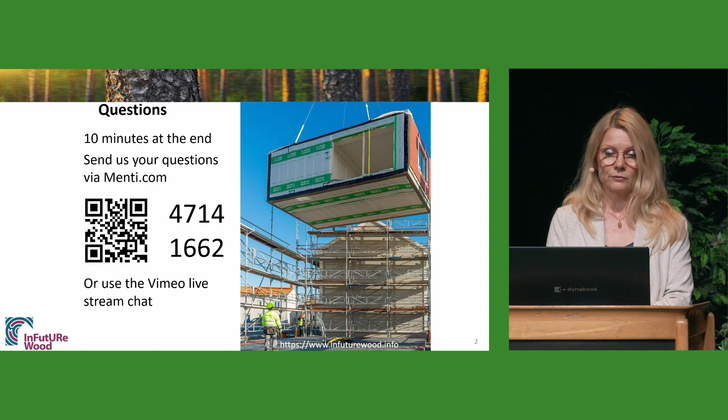InFutUReWood tries to explain or answer the question: how should we build today to be able to circulate tomorrow? And to do so, but the question is, why? Why should we do this? Why should we reuse wood?

Why should we recycle? Wood is a renewable source. The trees grow up again, binding carbon dioxide. But we do this because we have to, from many points of view, and you can see some of them here. This is a priority in EU and national regulations and initiatives for sustainable use of natural resources, and for collection, reuse of materials and waste.

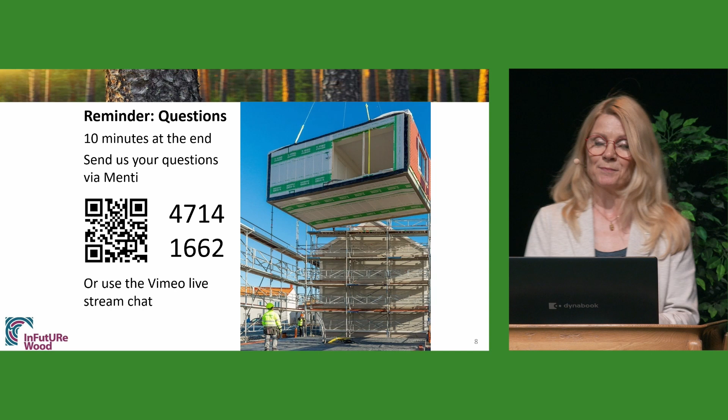And now I give over to Bahar Nasiri. Thank you, Karin. Good afternoon, everybody. I'm Bahar Nasiri, I'm actually from Aalto University. And today I present part of the work that we've done in the InFutUReWood project, and the topic is about inventory, deconstruction and quality of recovered wood.

The objective of the work we've done was to understand the volume, dimension, and criteria influencing the quality of reclaimed wood, and also to understand why prioritizing reuse and recycling of wood through cascading is important.

To understand this, as a first step, together with our colleagues in Spain and Ireland and us in Finland, we inventoried timber products in residential buildings. Our analysis basically showed that, for example, in Finland, 17.5 megatons of timber is in structural parts of residential houses in 2017, of which 60% are from houses built pre-1969. In Ireland, even though masonry construction has been the dominant construction method, wood can still be found in large quantities.

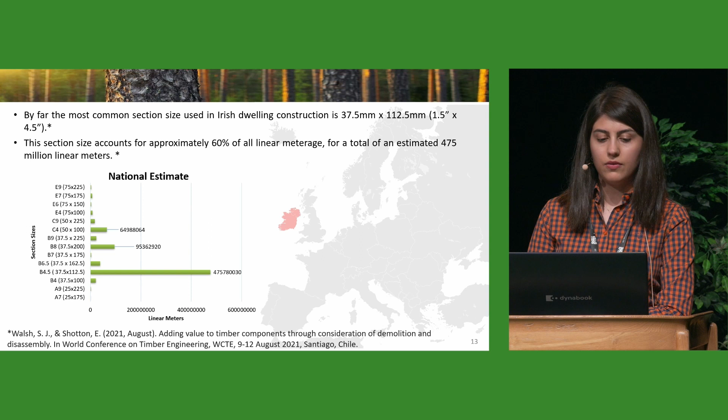And as you can see in this figure, 60% of the estimated stock is from B4.5 timber. Also in Spain, it was basically found that pre-modern buildings are a good source to find reclaimed wood, due to the different dimensions that we can get from these buildings, and also their joinery technique is basically steel-free, which is favorable for reuse as well.

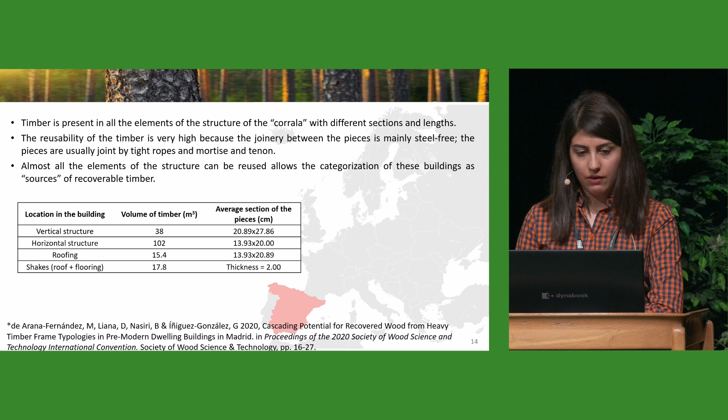But even though we have all these resources, reuse and recycling haven't been implemented in practice yet. To understand why, we basically talked to demolition waste management and wood processing companies in our partner countries.

From a few insights that we got from talking to people in industry, and also where possible conducting site visits, we found that mechanical demolition basically degrades the quality of wood, while deconstruction can decrease the risk of damage to wood. However, at the moment, deconstruction is not an economic, time-efficient, and viable alternative for contractors.

The design of buildings doesn't basically allow demolition contractors to extract the materials intact, and even when there is an opportunity where it can be, for example, easily reused or recycled, it is imperative to develop accessible, practical guidance on the development of design for deconstruction and reuse.

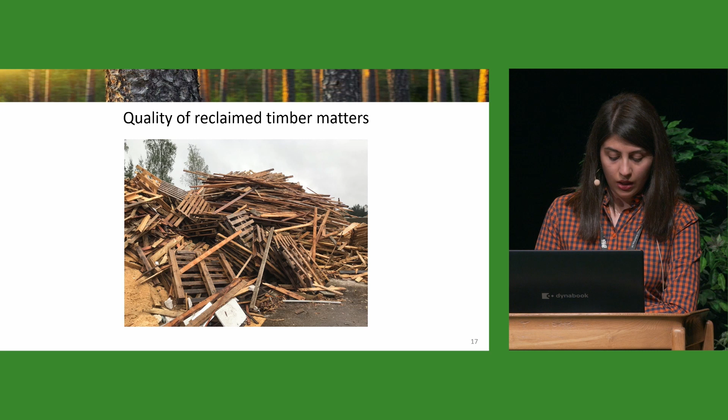Also, during the use phase and demolition phase, damage to wood may occur. Traditionally in some buildings, wood preservatives have been used to improve resistance to decay, and those materials cannot be reused or recycled at the moment because the substances used are basically hazardous.

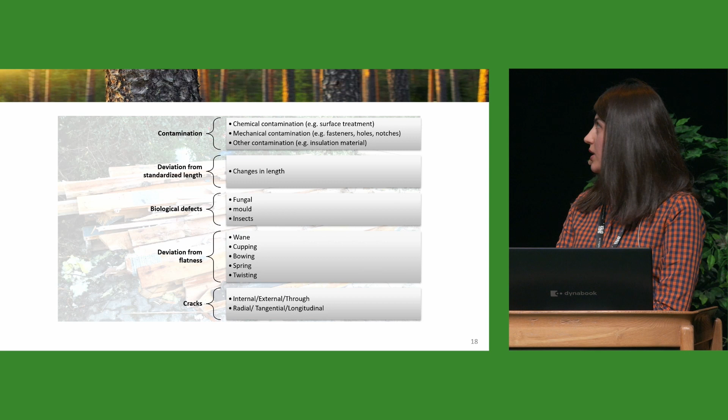To see what we should consider, we came up with this criteria, as you can see on this figure, that should be evaluated to determine whether the condition of wood meets the requirements for production of new products or not. We came up with a pre-sorting system to understand what we have as a secondary resource at the moment.

I want to summarize the key findings: the work we've done inventoried timber used for construction of residential buildings in Finland, Ireland, and Spain. The existing buildings in these countries contain a large amount of timber that could be reused or recycled.

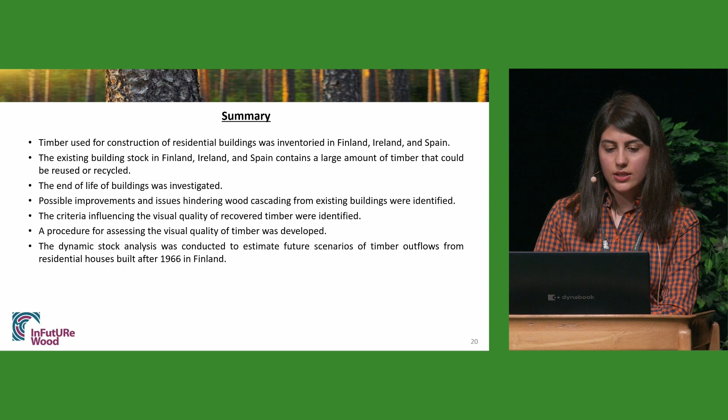In Finland, we also ran a dynamic stock analysis and estimated future wood waste scenarios for residential houses built after 1966.

Strength grading of structural timber isn't only about strength, but strength is the most difficult part of it. We can only measure strength destructively, so we have to use predictions and a probabilistic approach. This is done with the characteristic value at the 5th percentile. We grade in such a way that no more than 5% of the pieces have a strength lower than the strength class requirement. We just don't know which pieces they are unless we break them. With new timber, we make use of information about species and growth area, because both affect the link between the things we measure in grading, the indicating properties, and the things we are predicting, the grade determining properties. These correlations are more like associations than direct causal relationships.

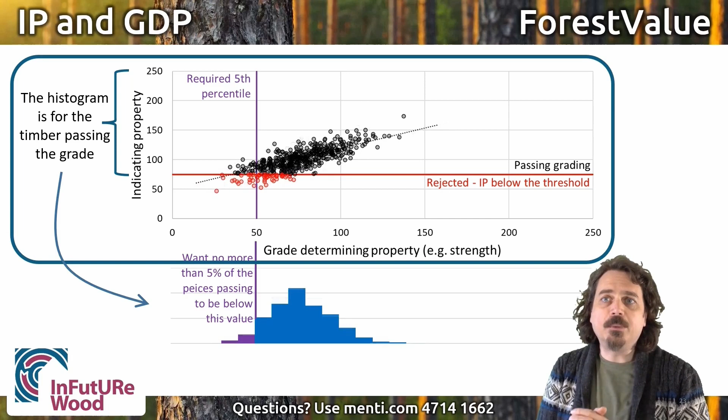Knowing species and growth area is not really possible for recovered wood, and is also complicated by growth conditions having changed over time, perhaps changing those correlations that we rely on.

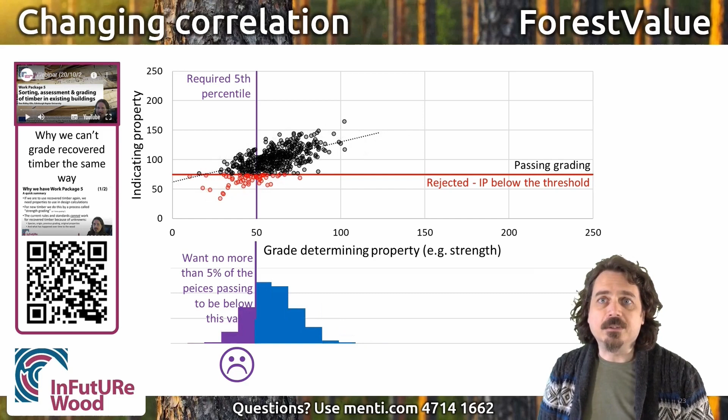But anyway, the current grading approach is inadequate because of something else even more important that might have happened. It might be that there was some prior grading or sorting, or perhaps something happened in service that changed the timber properties. If that selectively removed more of the stronger pieces, the characteristic value is reduced below what we think we have.

If we know the original grade of the timber, we have some helpful information, but we cannot necessarily rely on that. And anyway, who is responsible for that declaration of performance? We better have a way to grade recovered wood so that we can confidently use it.

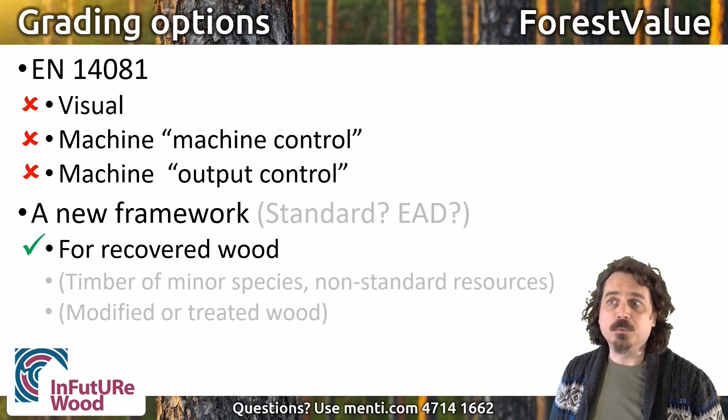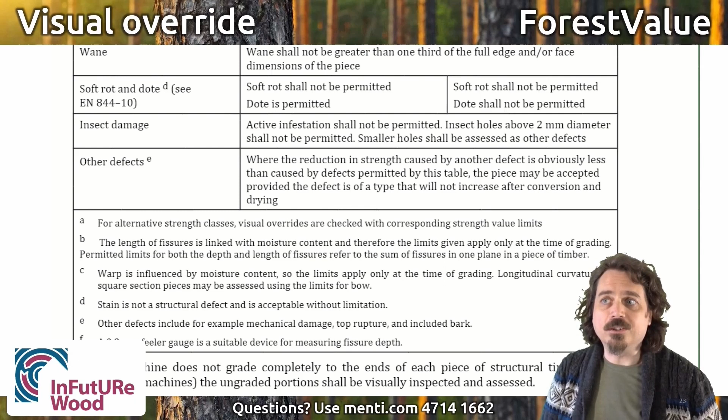The visual override step is like it is for new timber and serves the same purpose, but we need to include a few additional things that cover additional problematic defects that occur in recovered wood, such as drilled holes and cut notches. This builds on the sorting criteria developed in Work Package 4.

After we've done this, all the timber that we send to the grading process is potentially usable. The new strength grading process can be outlined as follows.

Use grading technology to assess each piece and get a probabilistic prediction of the key properties of that piece. Density and stiffness are pretty easy to do. Next, combine that probabilistic prediction over a set of pieces to get a combined probabilistic description of the set.

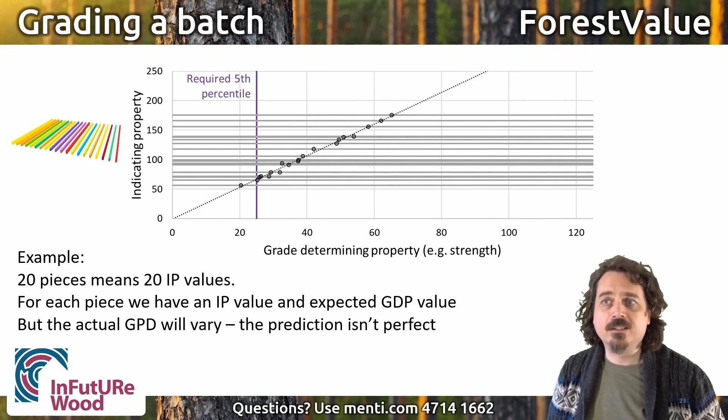Practically, this can be achieved by treating each actual piece as a multitude of possible pieces, representing all the potential strengths, so that we can work in a non-parametric way with numbers rather than distributions. Think of it as like seeing all the possible future timelines at once.

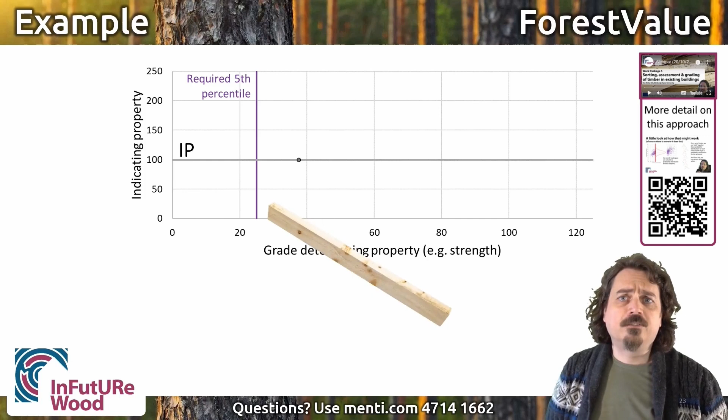So, for this example here, we have one piece with a certain indicating property value. That gives us an expected value for the strength, and a measure of how much it might vary from this. We can take a set of equally likely possible pieces, which covers the results we would get if we could test that piece many times, as if in slightly different parallel universes.

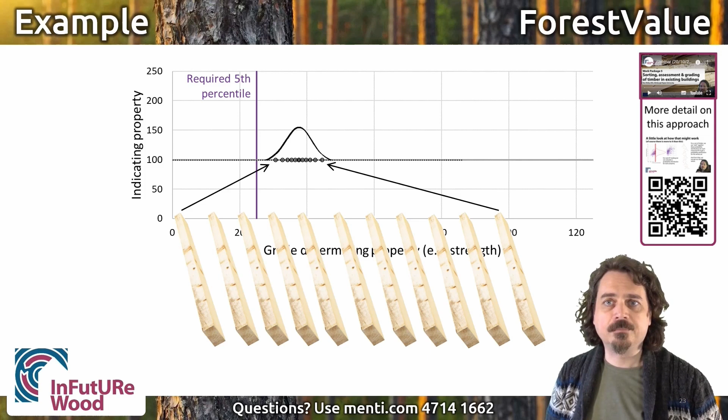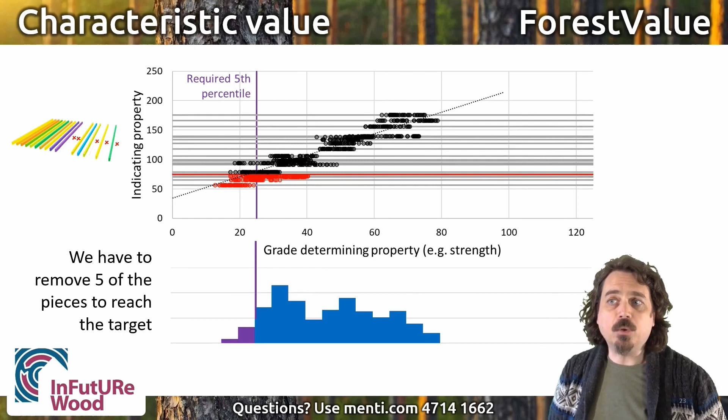That allows us to calculate characteristic properties of that set of pieces in the same way that we do now for new timber. We compare that to what we need for the target strength class or the application, and if necessary, we remove some of the pieces from the set to raise the characteristic values. When we remove an actual piece, we remove all the associated possible parallel universes pieces in that dataset.

In simple terms, comparing to how we grade new timber at the moment, we go from properties predictions made on populations of timber to making properties predictions on a piece-by-piece basis. But we also go from making grading sorting decisions on individual pieces to making grading decisions based on information from sets of pieces.

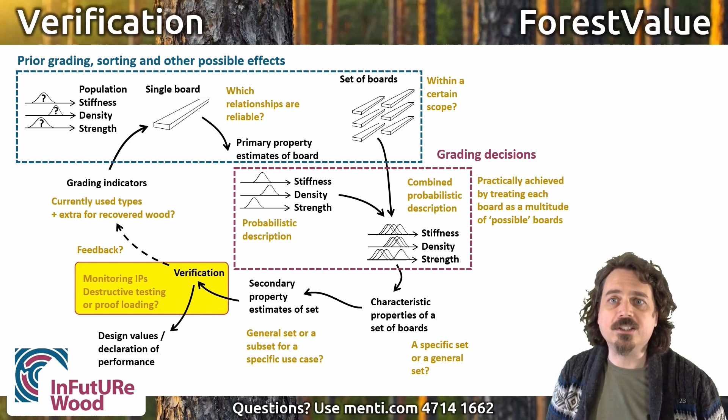We still need to verify the grading, and this can be done with a combination of destructive testing a portion of the graded timber and monitoring of the grading indicating properties to look for any problematic changes in the correlations. The data from the verification can help build better predictive models, making the grading process less conservative as more timber is graded.

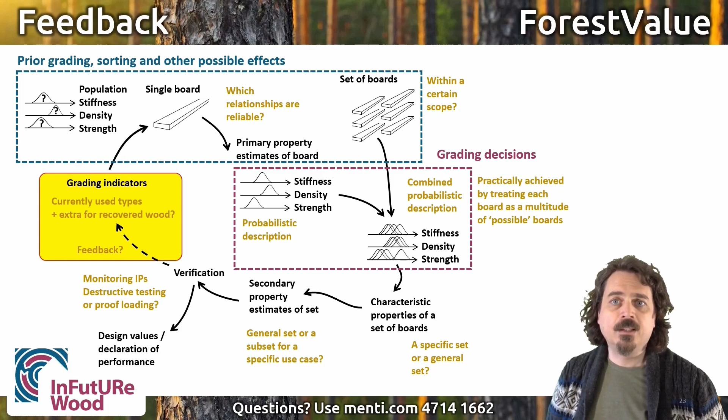To be able to do this, we still need to have some level of homogeneity in the timber being graded. But we don't need to be so specific about knowing species and growth area as we do when we apply the current approach used for strength grading new timber. Crucially, we can also compensate for the possible prior grading or sorting.

But that's not everything that we need to consider. There are perhaps degradation processes that affect secondary properties that make it different to new timber, tension strength and increased tendency to split, for example.

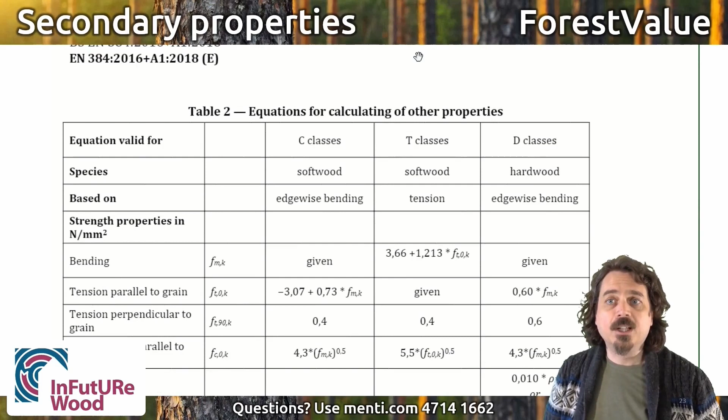That's something investigated in Work Package 4, and as far as the grading method goes, more research might mean that we need a different set of secondary properties equations.

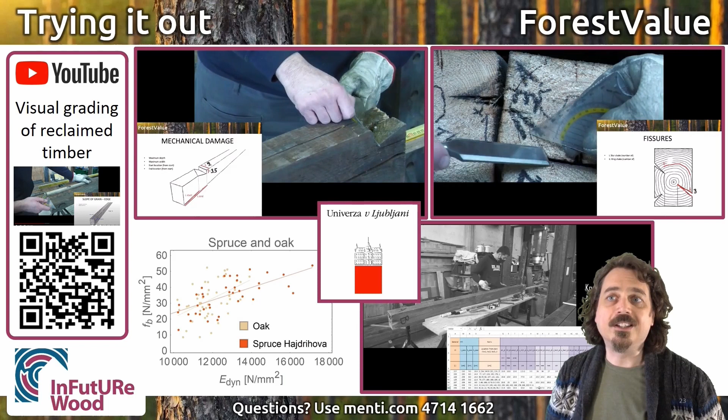With wood, what sounds simple in theory isn't always simple in practice, and the only way to properly discover the complicated things is to try it for yourself. So as part of the work package, recovered spruce and oak beams were measured and tested.

Results were compared to what we expect to see for new timber, but the main reason for doing this work was to uncover the practical difficulties of actually doing things.

Getting the required basic information about recovered wood will require a lot of testing, although some of this can be done as part of a commercial process, a combination of grading data and production testing.

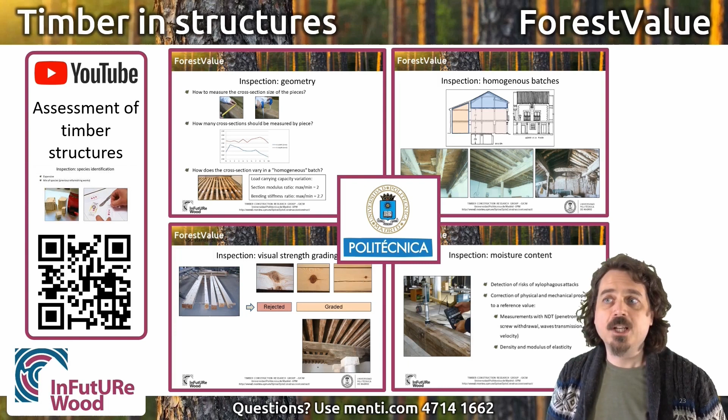Some of this approach can also be applied to timber in situ to assess properties that hopefully keep the timber in service longer through renovation and repair before reuse. In situ timber is more difficult to assess and measure, but we do have the advantage of knowing what each part is doing in the structure.

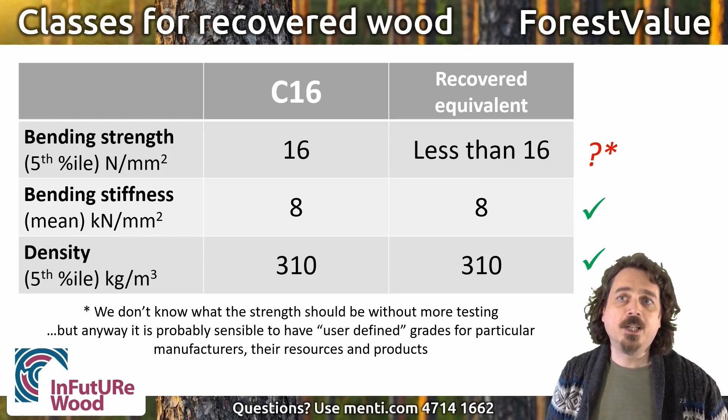In summary, strength grading as we do it now isn't going to work for recovered wood, but much of the modern technology that we have for grading can be used very effectively for a different approach to strength grading. This new approach can result in strength classes that work in the same way as the ones that we're familiar with, but those strength classes might need different property profiles to take advantage of the good knowledge we have about stiffness and density, and not be disadvantaged by the need to be more conservative about strength. Since not all timber engineering design is limited by strength, this isn't necessarily a big disadvantage for using recovered wood.

So in some way we can assess the properties of recovered wood, and that would give us a basis for making structural products from recovered timber. My colleague Annette Harte from NUI Galway will talk a bit more about that.

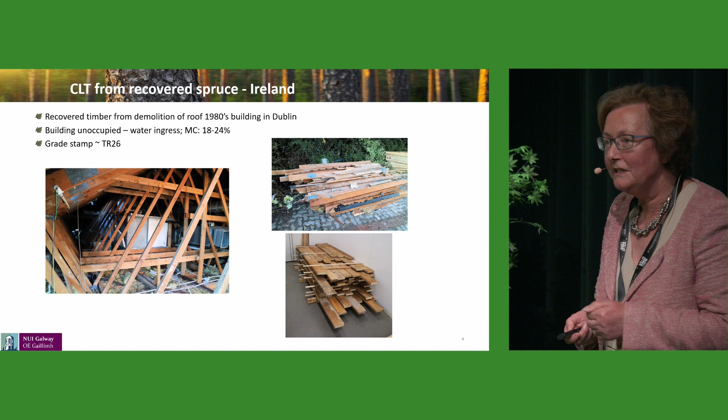So in the first stage of the assessment of this material, we carried out some non-destructive testing using an MTG handheld acoustic grader, which allowed us to determine the dynamic modulus of elasticity of the boards.

But of course, the new spruce in Ireland doesn't have these properties. So what we had to do was move, and we used Douglas fir batch instead, and that's why there are two different species used here. It's really to match this.

We did a similar evaluation of the Douglas fir, and we found that we had a batch with a very similar range of dynamic modulus of elasticity values. So using these two batches of material, we manufactured small cross-laminated timber panels for testing in bending. We had three 3-layer panels, which were 60 millimeters deep.

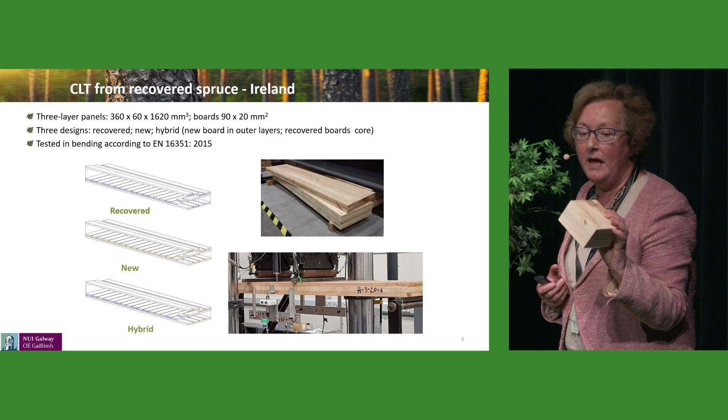This is a piece of one of the panels made from the recovered spruce. So we had 3 different designs for each case. We had the recovered material, we had the new material, but we also decided we would try and look at a hybrid panel, because a lot of the material that we're getting from recovery is short material.

And obviously we can join it with finger joints, but we're going to have a lot of finger joints. So perhaps we look at partially replacing new material. So this is the reason for considering the hybrid example here.

So these were tested in bending according to the standard, and this is what we found. Essentially, the failure mode was what we expected from testing cross-laminated timber in bending, that we had failure initiating at the tension face, near the location of a knot or large slope of grain, which propagated through the section.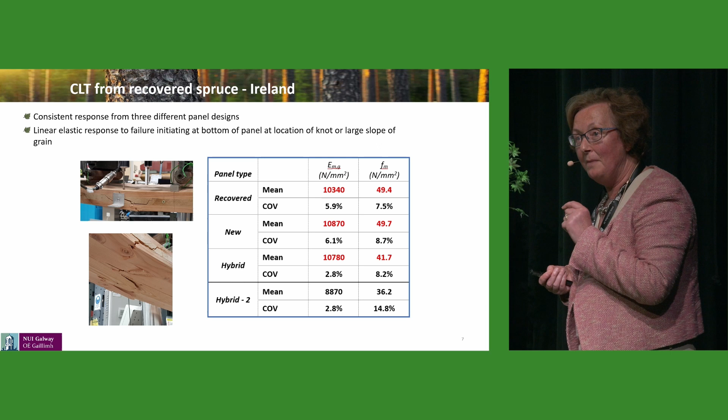Looking at the strength, we were actually rather surprised to find that the strength values were also the same. Now, there may be various reasons for that. The timber is only 40 years old, so it's relatively young. I mean, we're talking about really extending service life. But it's shown that even with material that has been subject to very adverse conditions in the more recent years of its life, we're getting good properties from it.

We also created another batch of 3 hybrid panels from the remaining material, which had a lower global modulus of elasticity, and we didn't find anything strange about the results, lower properties in general. So just based on this initial study, this seemed to be something that was working quite well.

Moving on to the study that was carried out in Spain by our colleagues that I mentioned earlier, they used material that was much older. This was oak from a timber frame house in Álava, which was between 150 and 200 years old. And you can see the batch of timber here on the left.

This doesn't seem to be working for me, no.

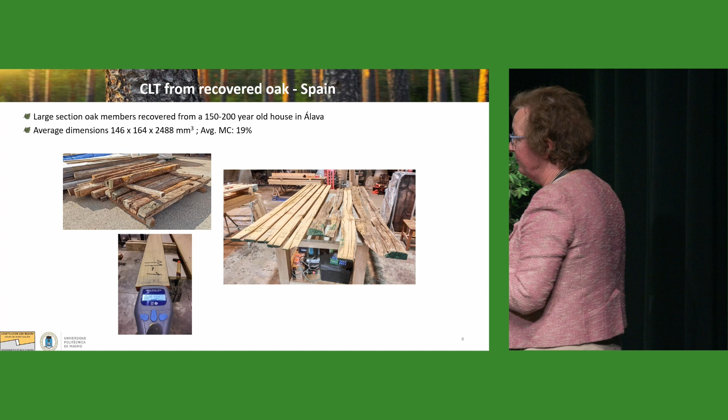But on the top left here, you can see it's a larger section size rather than the roofing members. It's about 150 by 160. And here on the right, we can see what has happened as a result of the sawing of this into boards. We have a large amount of waste material. The evaluation of this material was carried out in the same way that we did for the spruce in Galway.

This resource was then used to make 2 separate products. So in the first instance, 3-layer CLT panels were manufactured, again 60 millimeters thick, but 4 designs were considered this time. So in addition to the new and the recovered, and having the recovered timber on the cross layer, they looked at the inverse as well, having recovered timber on the outside and the cross layers of new timber.

And if we take a look at the results of these bending tests, on the top here, what we're looking at is the global modulus of elasticity for the 4 designs.

And this mean value, there's no significant difference in the mean value across the 4 designs.

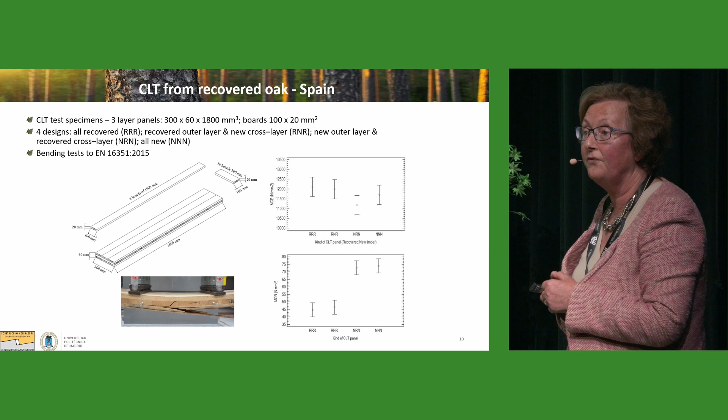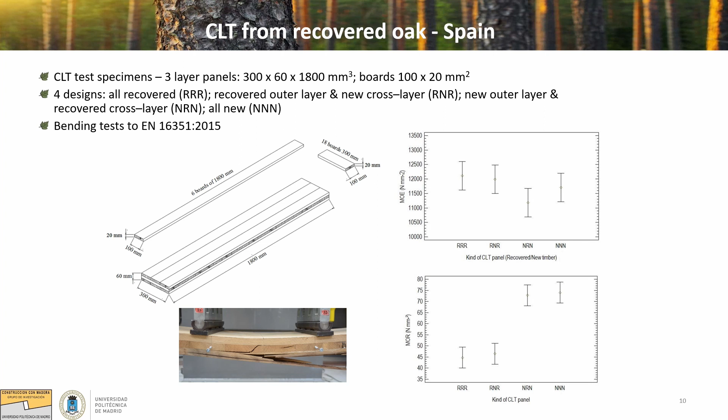However, we see a completely different picture when we look at the lower graph, which shows the bending strength. What we have for the 2 lower values on the left, they are the ones with recovered oak on the tension face or outer layers, whereas the 2 on the right have new timber. So what we're seeing here is a very significant difference in strength. Now, while it is significant, we're still seeing very high strength values. The recovered timber values there, we're looking at about 45 newtons per square millimeter, which is obviously quite significant.

For the glulam beams, 5-layer beams were manufactured, again with 20 millimeter lamina, and they were 100 by 100. And 2 types were considered, all manufactured from new, all manufactured from recovered timber.

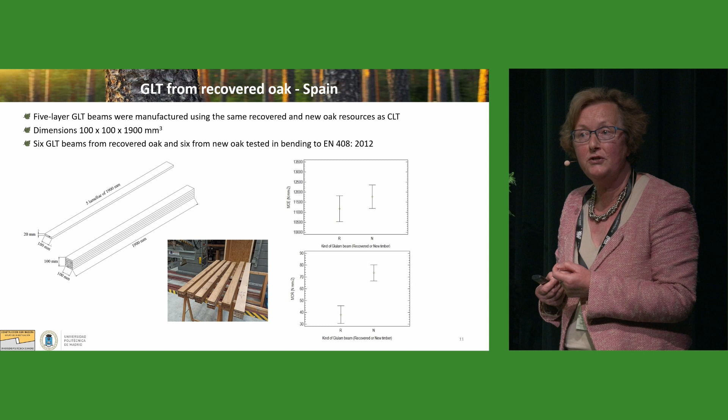And here, if we look at the top and we look at the modulus of elasticity, again we've got matched samples, so we're getting matched modulus of elasticity values. And we're seeing the same behavior in the strength, which isn't surprising since it's the same batch of material. But there's a significant difference here in the strength of the oak, from the old to the new. And I suppose this points to the fact that we really need to look at a lot of recovered material and test it and understand what are the factors influencing the long-term performance.

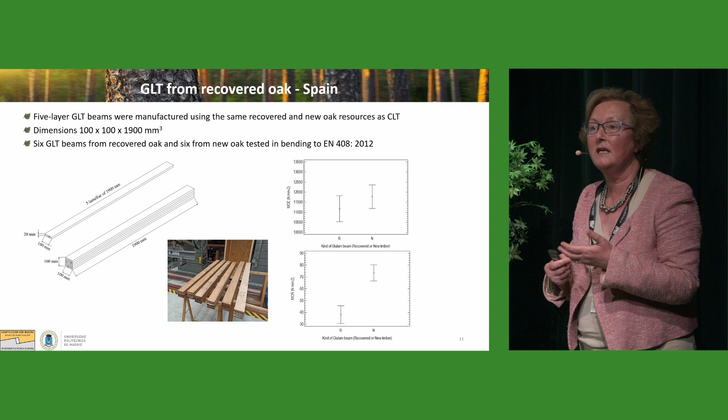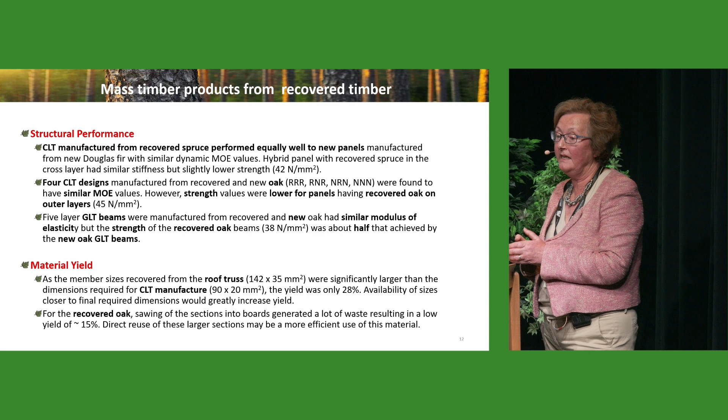So just to finish up, really what we've seen here is that cross-laminated timber manufactured from the recovered spruce from that roof structure performed equally well to that of new timber. But when we started to look at the oak, we found no difference in the stiffness performance, but the strength values for the products from recovered oak were about 50% of that from the new oak.

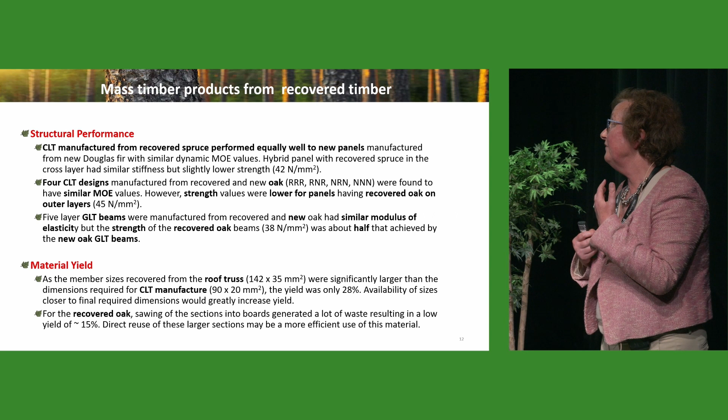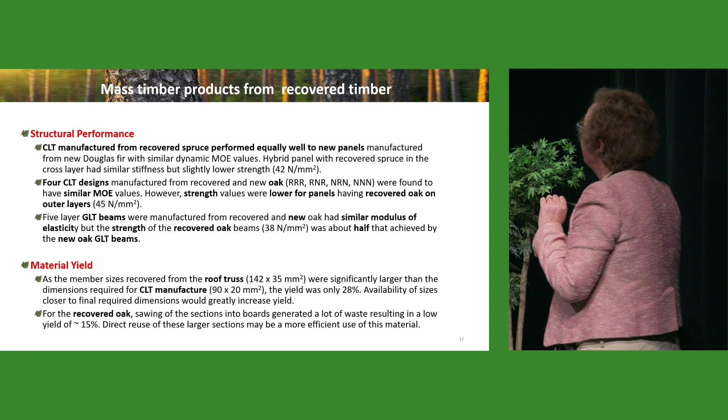A practical consideration from the point of view of feasibility is what is the material yield. In the first case, where we had the roof example, the members recovered from the roof structure were actually quite large relative to the size we wanted for those panels. So what we got there was that the yield was only 28%. But if we had available to us members of a closer size, we would have had a higher yield.

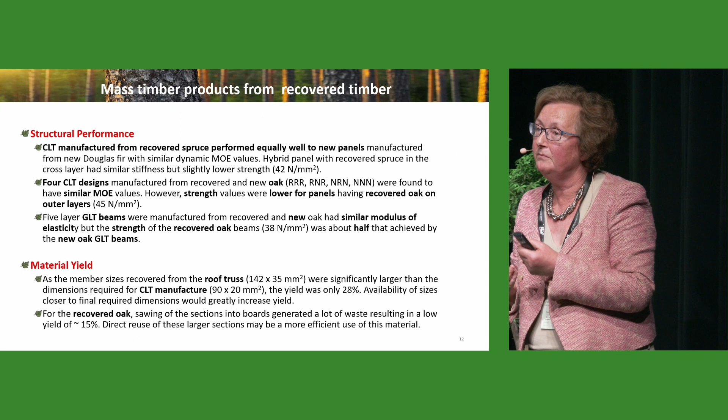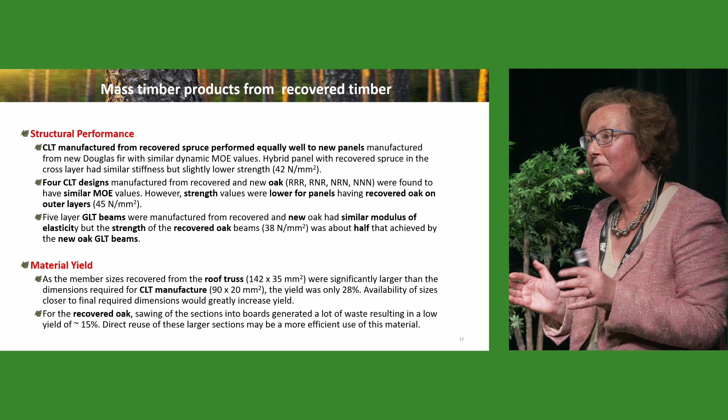The yield for the oak was much lower, at 15%. And so, in considering the type of material, I personally would not like to see those beautiful old oak beams cut up. I think for heritage material like that, they're probably better reused as they are rather than cutting them up. But this is just the material we had available to us in the project, and there should be other applications available.

So I see my colleagues here have stop signs coming at me left, right, and centre. So I will conclude with that.

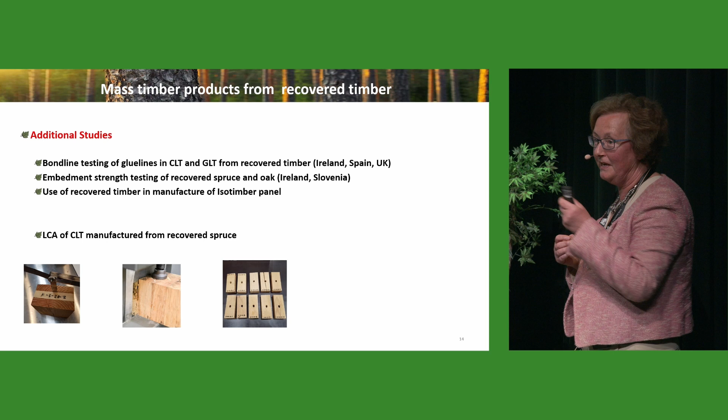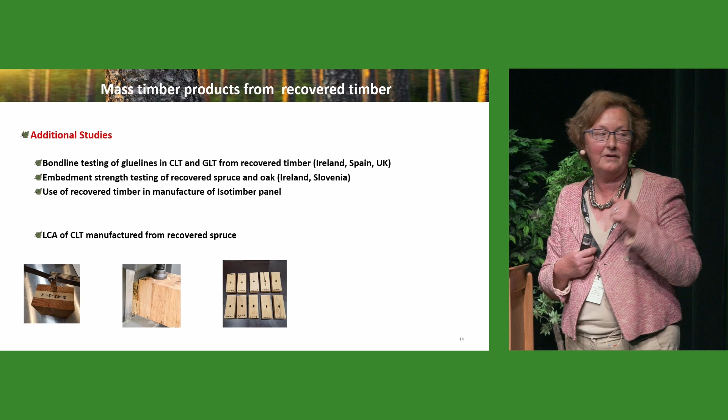But just to very briefly mention, as part of this work we have done some other testing, including bond line testing of glue lines, embedment testing of recovered spruce and oak. I was very interested to hear about the connection study earlier. We also used recovered timber to manufacture Isotimber panels, and an LCA study has been carried out on the use of this recovered material that you'll hear about in a little while. So with that, I'll finish up and hand over to my colleague Ylva Sandin from RISE.

So we've seen that there is a lot of wood in existing buildings, and there are some challenges to the reuse of them, and some questions on the quality of the wood that we can retrieve. So we have also worked in this project with the question of designing out waste, thinking of reuse already in the design phase, and finding methods and design solutions for that.

I'm Ylva Sandin, I work at RISE, and I have been a work package leader, but more than 20 people have contributed to this work, both from academia and industry. I have 3 persons here representing industry today, and we will discuss experience from this project. But first, let me give you an overview of what we did. Our objectives were first to find a method to optimize a primary design for deconstruction and reuse, which showed to be really difficult.

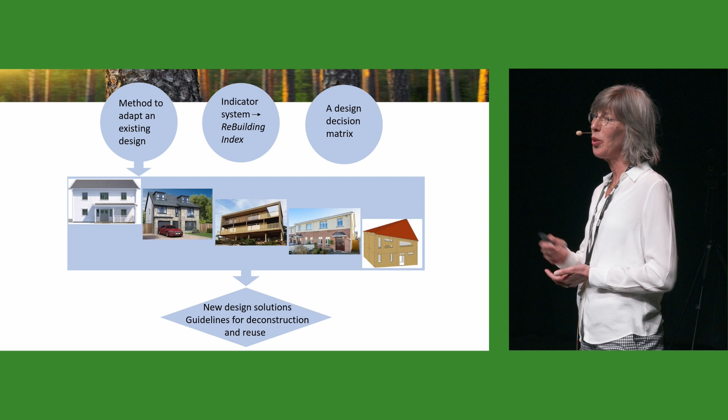First, I would like to talk a bit about the situation today, as kind of a background picture. To what extent is deconstruction and reuse considered in the design phase today?

And maybe if you could start, St, as an architect representing the architects, or yourself, whatever. Well, I don't know if I'll represent all architects, but I think from design for deconstruction - I suppose it's only one part of the process that we looked at - consideration of design for deconstruction and reuse is really, I would say, there's very limited consideration in the general architecture community, to date at least. And I know that there are exceptions. I know that, for instance, many practices in Scandinavia, a number of them are making very interesting and progressive work in it, as well as in Belgium and the Netherlands. But in Ireland, at least, in the general architecture community, there's very little uptake of that process.

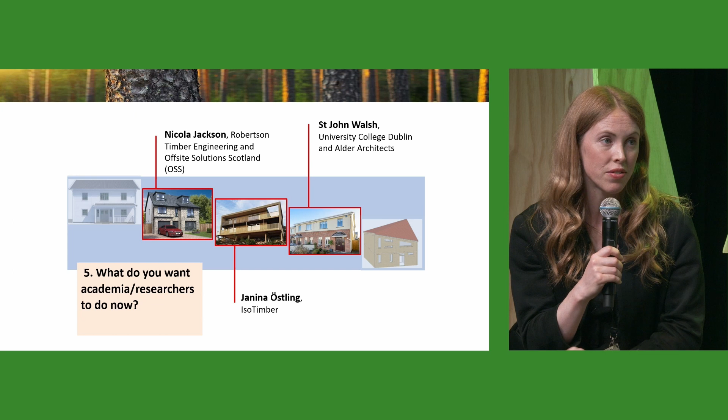I would like to see this method or standards developed further, because our analysis in this case study was theoretical. I would like to have it more proven, so you could trust the results.

The tall timber buildings project and also the hardwood fasteners work were very interesting to listen to, so I think we should continue but combine the projects. I'd echo that—to convince clients when building, time and cost are everything.

You need to be able to convince a client and a contractor that what you're proposing is feasible. We're all wary of cost now, so it would be good to get objective results about the impact of design for disassembly and reuse strategies on taking a building apart or reusing materials. That would be very useful, and allied to that, material specific guidelines would be really helpful.

Very good topics. We didn't have the opportunity to take apart buildings and re-erect them, unfortunately. We asked Derome, but they wouldn't let us.

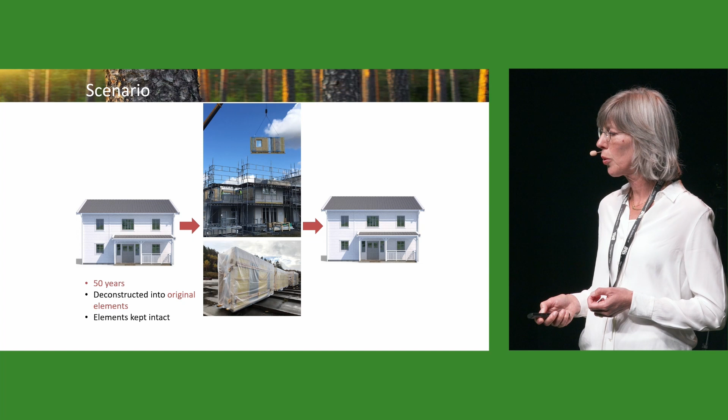In order to do that, we needed to focus on a scenario. Due to limits of time and resources, we chose only one scenario. We studied the scenario that after 50 years, this building will be deconstructed into its original elements. These elements will be kept intact and transported to a new place, where the building will be reassembled to a similar or identical building in the same region, so that we will have the same snow and wind loads. And we consider no changes in building regulations. This could be a good scenario if the alternative is to demolish the building.

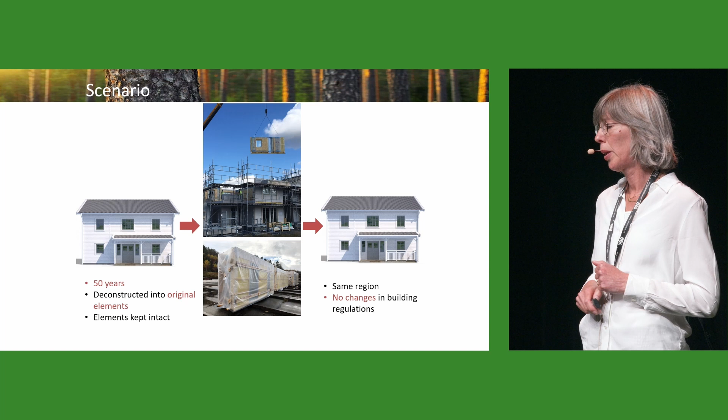And other case studies focused on other scenarios, so we have scenarios considering taking apart the whole thing into its components. We found that it would be good to improve 3 details: the wall-to-wall meeting, the wall-to-floor meeting, and the meeting between floor cassettes. We'll now see some animations of the current details and the improved ones.

So first, the wall-to-floor and wall-to-wall meeting. Today, you can see the screws coming there. We have a wall-to-floor meeting, and the wall is screwed to the base plate. Here comes part of a wall element with the vapor barrier folded back and a piece open so that it can be screwed to the adjacent element.

Then on site, the vapor barrier is folded back. The joint is sealed with something called a butyl band. And this gap is filled with insulation, a stud, and OSB.

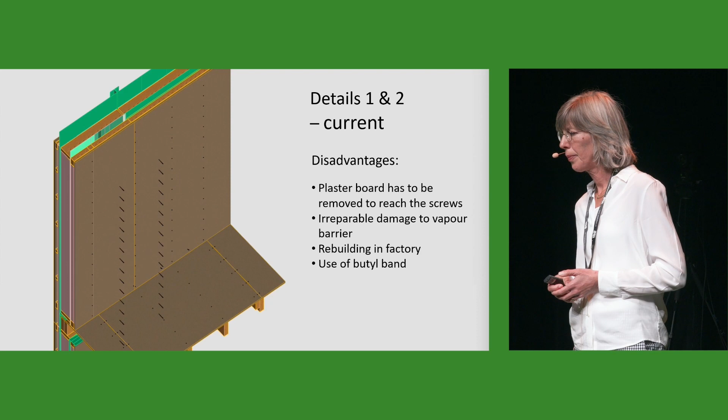And finally, the floor is completed, and the walls are covered with gypsum plasterboard.

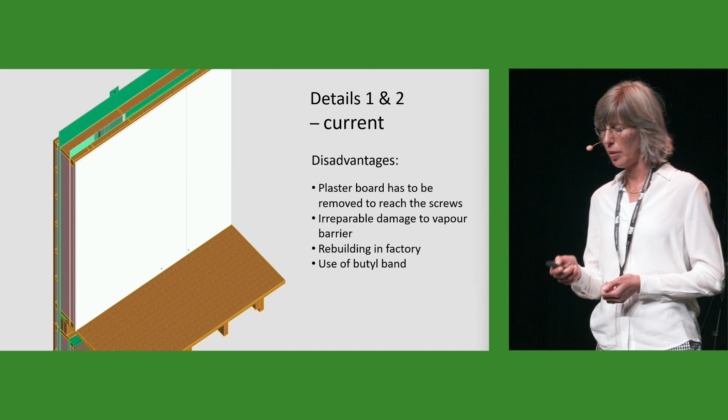Disadvantages of these joints are that in order to reach the screws, you will have to tear away the gypsum plasterboards, and you will have to cut this butyl band, or you will destroy the vapor barrier. It will not be airtight in a new position, so we'll have to rebuild these elements in the factory before reuse. Also there's the question of the butyl band - Derome wants to get rid of it as it's not very environmentally friendly.

With the new design, the element comes with the gypsum plasterboard on, and it's more completed. There is now a gap between the wall and floor here. So now the wall is screwed to the base plate, and here comes the second element, in a more finished state, with the gypsum plasterboard on. It's still possible to screw them together. It's sealed with an ordinary tape, and then this is made good on site. So we got rid of the butyl band.

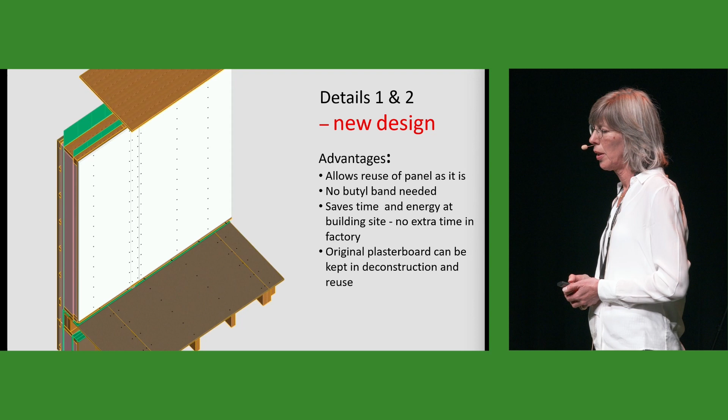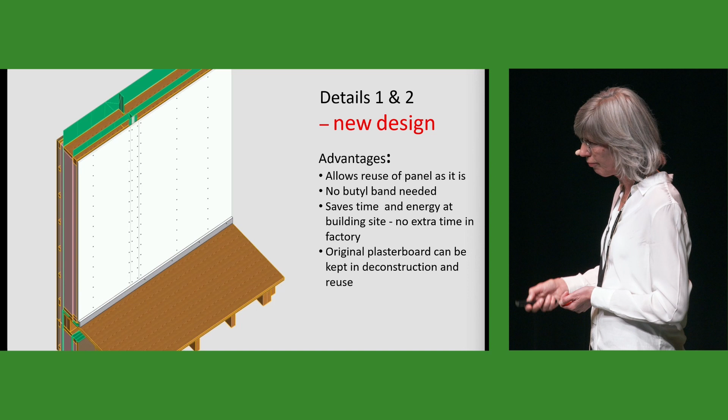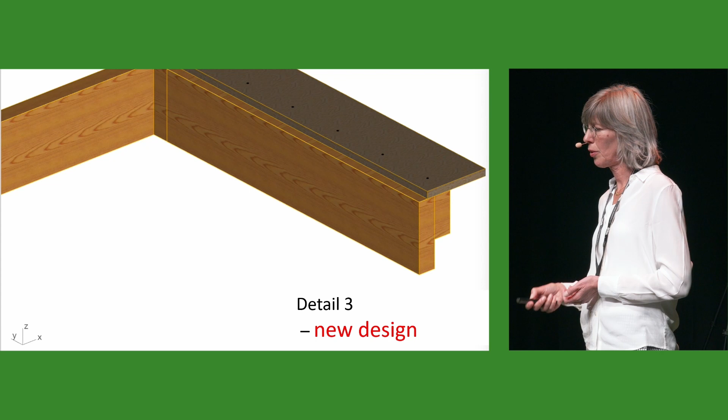This is completed with the floor, and to hide the gap, we need a skirting board. We also improved the floor cassette joints, because today there is glue in this connection. But with the improved design, there's no glue between the floor cassettes - it's just screwed together, and it can easily be deconstructed.

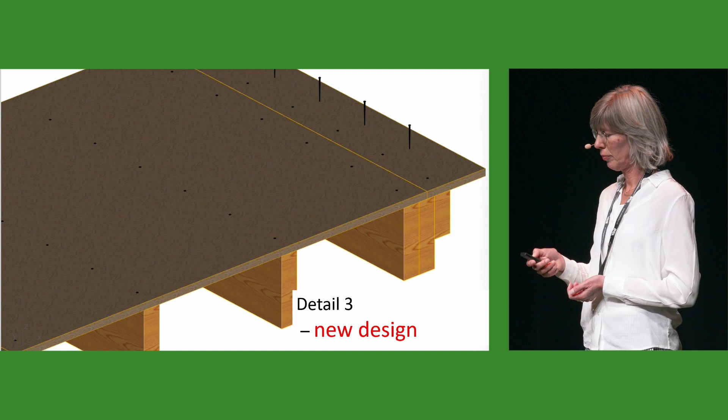I'll have to stop because I run out of time, but I will jump to this picture.

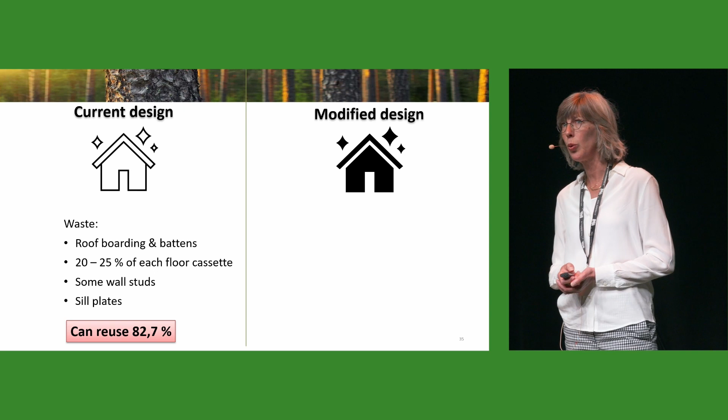So did we design out waste? Yes, we did to some extent. With the current design, all the roof boardings and battens go to waste if we deconstruct and try to reuse it. 20 to 25% of each floor cassette will go to waste, some of the wall studs and all the sill plates. That means we can reuse 82.7% of the wood or wood-based material in the building with the current design.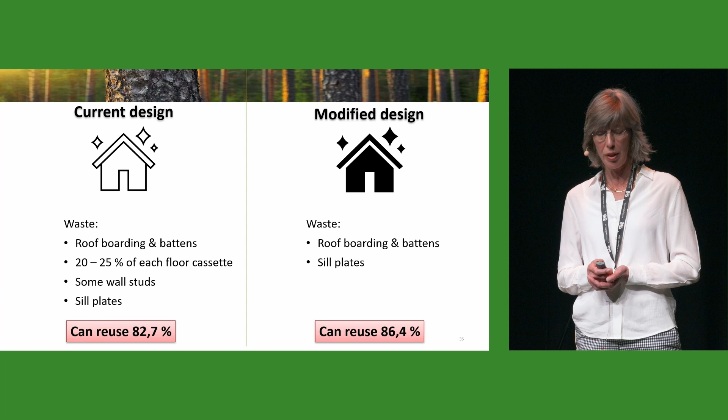But with the modified design, only roof boarding, battens and sill plates will go to waste, nothing else, so that we could reuse 86.4% of the wood or wood-based materials. We also want to know that this new solution is good for the environment, so we want to compare the LCA and LCC for the current design and modified design, and that is what Rafaela has done. So now over to Rafaela.

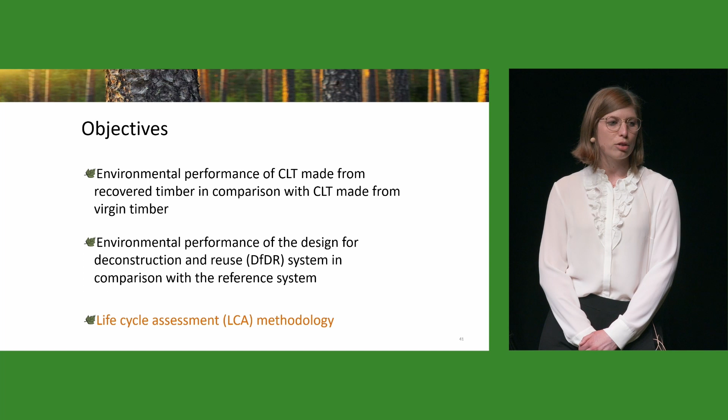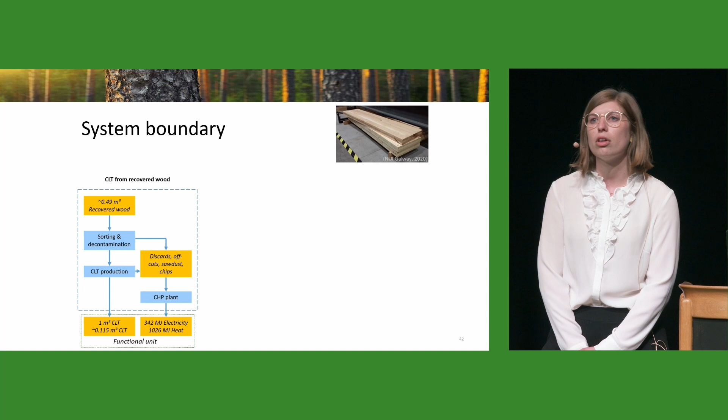Let's start with the CLT from recovered timber. Here you can see the system boundary - to produce 1 square meter of CLT made from recovered timber, we approximately need 0.49 cubic meter of recovered timber. It's even double the amount of virgin material needed, because we have a lot of pollution, screws, lower cross sections, but this also relates to a high amount of residues which can be transferred into energy production.

If we produce 1 square meter of CLT, we also gain 342 megajoules of electricity and 1026 megajoules of heat. This is the functional unit - the CLT and the energy - which is the basis of comparison of the two systems.

So in contrast, we have the reference system and also the production of 1 square meter of CLT. But if we take the residues from the manufacturing and produce energy, we are not gaining that much energy as we would from the recovered timber. Therefore, we need a system expansion to have an equivalent amount of CLT and energy.

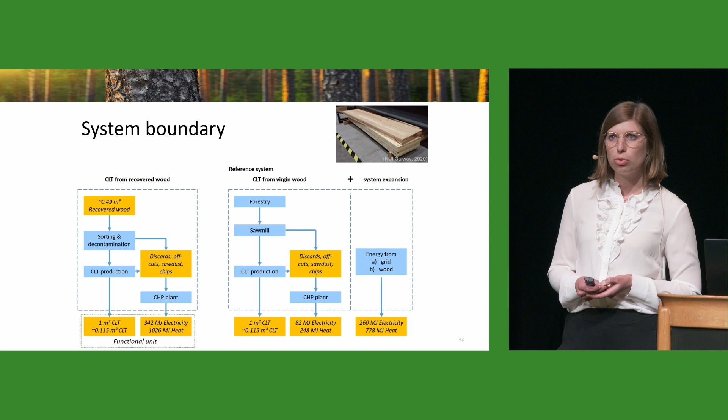The system expansion can be made option A, from grid, so we use the ordinary energy grid from Germany, or B, from virgin wood.

I would like to show you some results now. I only picked the environmental impact categories, global warming potential and fine particulate matter formation. We do have a lot more, but this would be too much for this presentation right now.

So the first bar you can see is the emissions related to the recovered wood. The second bar is the virgin wood with the system expansion from grid. And the third bar is the virgin timber with the system expansion from wood.

Here you can see that the green bars are higher, or the emissions with the green bars are higher, because we have a higher drying effort. If we use virgin wood, we have a moisture content of approximately 70% and have to reduce them.

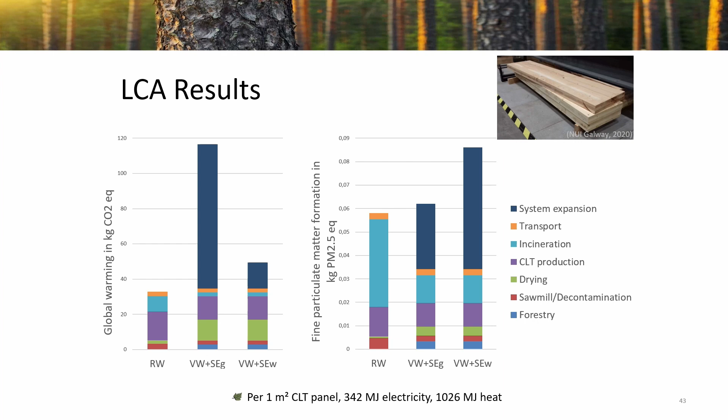And another big bar we can see is the light blue one, for example, by the fine particulate matter formation. Those are the emissions related to the incineration. As explained earlier, with the recovered wood, we have a higher amount of residues, which will be incinerated afterwards. And the incineration causes a lot of emissions, in particular fine particulate matter.

But the main influence we can see on the system expansion. And the system expansion is also mainly the energy production from incineration wood, which is the third bar, and also the energy grid, which is mainly from fossil fuels and abiotic materials.

So we can see that the recovered wood, or the CLT made from recovered wood, has less environmental impacts compared to the ordinary. Let's come to the second system case study I will show you.

It's the Villa Anneberg. And here I will start with the reference system, so the ordinary Villa Anneberg, and we put the focus on the ground floor, so on the exterior walls and the floor cassettes from the exterior wall. And the functional unit of this system is 1 square meter of net floor area, and over the lifetime of 100 years, because we have 2 buildings life cycle, as Ilve explained earlier.

Here you can see we started the modeling according to the standard 15804, so we're including all building life cycle stages, starting from the raw material supply, the manufacturing, the transportation on site, the assembling, the use stage, and the end of life, as well as the waste management.

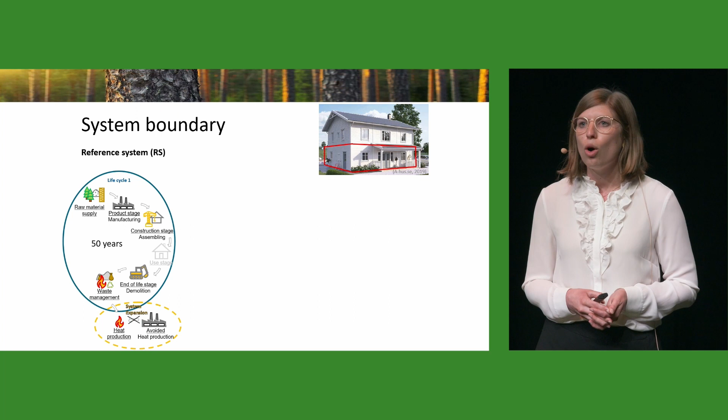For the reference system, we have mainly the end-of-life scenario that the wood is going into the incineration. Only a small amount of the waste is going into landfill or is recycled, like the steel scrap. With the incineration, we are producing a lot of energy which is not used in our product system. Therefore, we transfer them outside of our system boundary, and we can recalculate them to avoid energy from fossil fuel production.

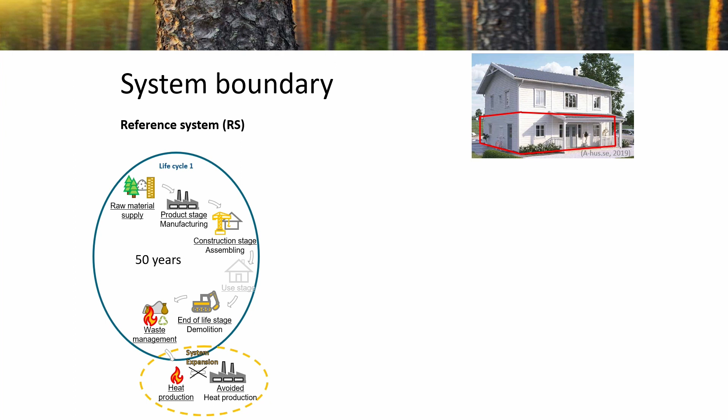In contrast, we have the DFDR system with a different end-of-life scenario. Here we don't have the incineration. Here we are trying to recirculate the wall and the ceiling elements and use them as a base for the second life cycle.

When I'm adding the second life cycle of the reference system, it's identical to the first one. If we have the second life cycle for the DfDR system, we use the recovered elements from the first and transfer them back, have the second building, and then the end of life is also incineration.

Then the results of this investigation, you can see the reference scenario as the first bar, and the second bar is the DFDR scenario. And just as an explanation, the yellow diamond is the difference between the positive and the negative emissions, because due to the information module D, we have negative emissions, because we are avoiding energy production from, for example, fossil fuels.

Here you can also see that the DFDR system has a lower impact. This is related to the smaller material input, because we are reducing one whole part of raw material supply, which is the main impact of the stage A3, the manufacturing. Here you can also see the small orange bar.

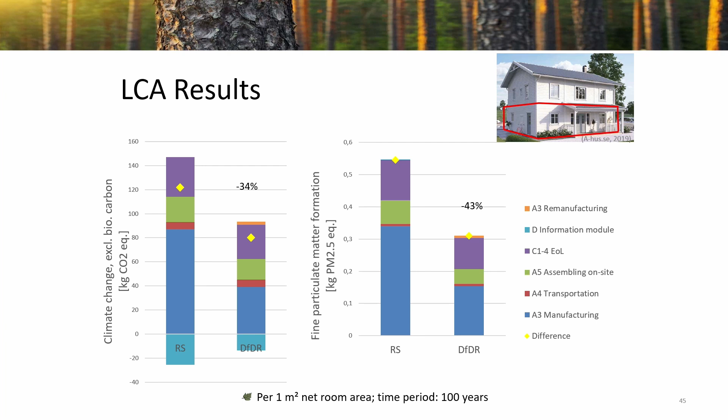This is the remanufacturing of the DfDR systems. They have a really small influence on the impacts.

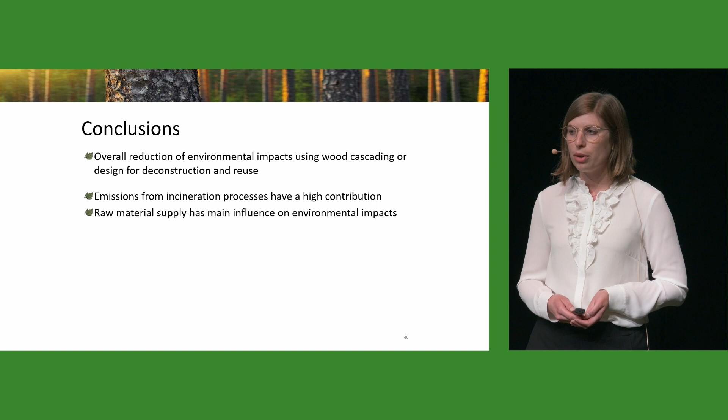So let's come to the conclusions. Overall, I can show you we have a reduction of the environmental impacts by using or producing CLT from recovered timber and also using the DfDR systems. For the CLT system, I could show you that the incineration of the wood and also the energy production from grid or from fossil fuels have a very high impact on the environmental impact. For the DfDR system, it was able to see that the material reduction, so if you reduce the raw material supply, this also has a huge influence on the environmental impacts. Therefore, when we are implementing the circular economy into the construction sector, we are able to reduce the environmental impacts and also reduce the raw material supply, which we want to have, because we only have a certain amount.

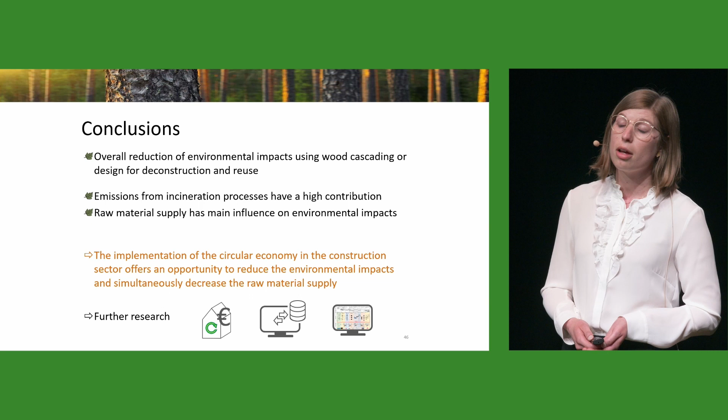Despite the positive effects of the LCA calculation, we did further research, which I'm not able to show today. We also made a life cycle costing analysis, and we also developed a life cycle inventory database for the building demolition stage, so we are able to introduce the end of life stage, the demolition stage, into the early LCA calculation. And we also give some recommendations about building documentation, otherwise we are not able to recover or reuse materials.